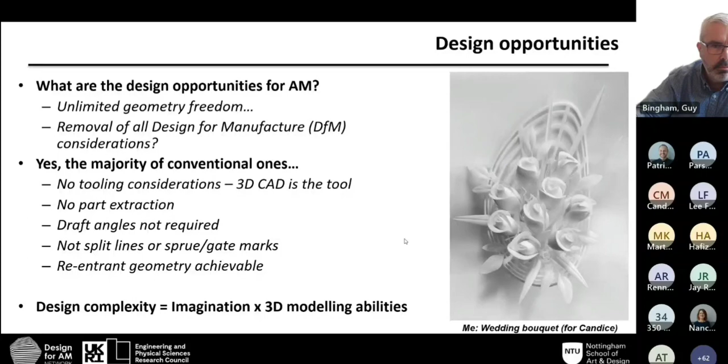Oh, we're still sharing? Hello? Yeah, you're still sharing. Have you moved on to the next slide yet or not? No, I have now. No, yeah, you're good.

Okay, so some of the opportunities AM presents include things like design optimization. Now, topological optimization has been around for a good long while, but it's now becoming really, really accessible to mid-tier 3D CAD platforms. It's embedded with SolidWorks, it's embedded with Autodesk.

And this is about taking your geometry in its existing state, providing loads and constraints, so fixture points, and then using an FEA type process to work out all the stresses and strains on your object, and then removing material where it's not required. And this truly gives you an optimized structure. And we're seeing this done in conventional parts for fixtures and fittings, but we're also seeing this more in the design sphere. So we see an example here.

This is the Generico chair by Marco Hemmerling. And this is really using 3D printing to its full potential. So it does create a particular aesthetic, but this is something that can't be created using more conventional manufacturing techniques.

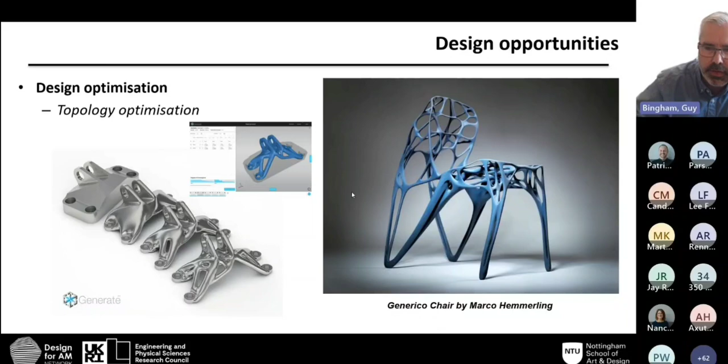And then moving on from that, we can explore the generative design aspects. Now these objects aren't designed to be optimized in terms of some kind of performance characteristic or weight distribution or material usage. This is about just exploring organic and lattice structures. And this has become much more accessible through things like Grasshopper and 3ds Max. So I've got some examples that I've done quite a while ago now.

So the street furniture, again, this isn't an optimized structure, but it's using that particular visual language and aesthetic that can only be realized through 3D printing and additive techniques. And of course, we can explore really, really complex geometries and organic cellular structures. And you can see that on the right, this is a bit of 3D printed art sculpture. But obviously this could be extended to conventional design of products and fixtures and fittings, and be incorporated into that general visual language.

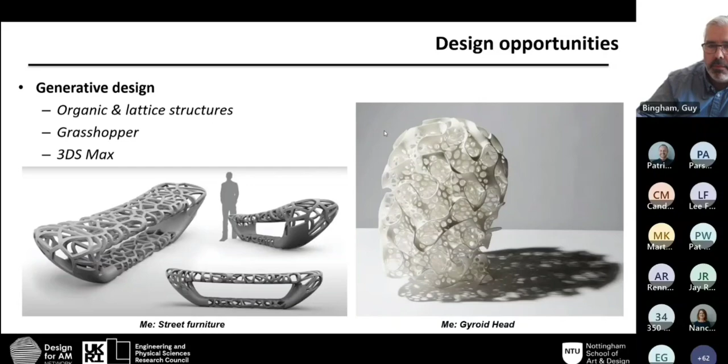Moving on from there, we have design opportunities in personalization and customization. With additive manufacturing, because we're not constrained by tooling, and obviously 3D CAD is our tool, it allows us to explore things like the economic manufacture of a single unit, or N equals 1. And that allows us to do things like complete bespoke designs, or engage in things like co-design and co-creation.

So we have the example here from Lionel Dean, and this is obviously going back a few years now. And it looks like a pretty standard 3D printed lamp, because obviously the market has now been inundated with this stuff. But this was actually based on co-creation. So there was an algorithm deciding this geometry. And through an animation, this would play and evolve and develop over time. And as a consumer, you could co-create. You could stop the animation at any point and then have that printed out. And that is a capability that's only been realized through additive techniques.

But then, of course, we can also engage in things like personalization for the individual. So we can engage in body fitting, and I know that there's going to be some medical applications presented later on. Things like implants, where it is entirely bespoke to a single user.

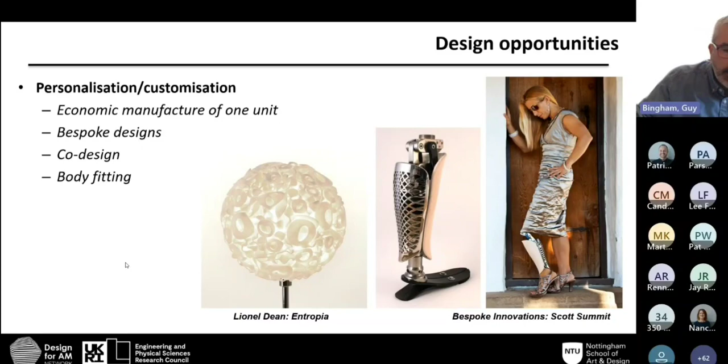But here we have an example from Bespoke Innovations and some of the Scott Summit work, where he was looking at prosthesis. So not only was he using personalization and the capabilities of 3D printing to recreate the fairing here, but also engaging in co-creation and co-design to actually do the more functional aspects of the prosthesis, and then obviously match that to the user's requirement, their particular aesthetic, their lifestyle choices. And again, something that can only be realized through 3D printing.

I think we're all quite familiar with the opportunities in terms of part consolidation. So we have quite a nice example here from Proto Labs. So this is the design journey of a distribution manifold. It would have been a pretty traditional part using conventional manufacturing techniques, injection molding, machining, etc., and a whole host of assembly. But through 3D printing, we can go through an iterative design process here to not only reduce the parts, but then optimize those parts.

So we go through a stage of initially 11 parts, we can reduce that to 7. And again, that can be further designed and refined to become a single part. And then you can engage in things like design optimization, topological optimization, to reduce the weight and increase the performance. But it gives us the opportunity to think about how we can use the design potential to integrate things like fasteners, fixtures. We talked a lot about live hinges, but springs. There are real opportunities here for improving the design of just conventional everyday stuff.

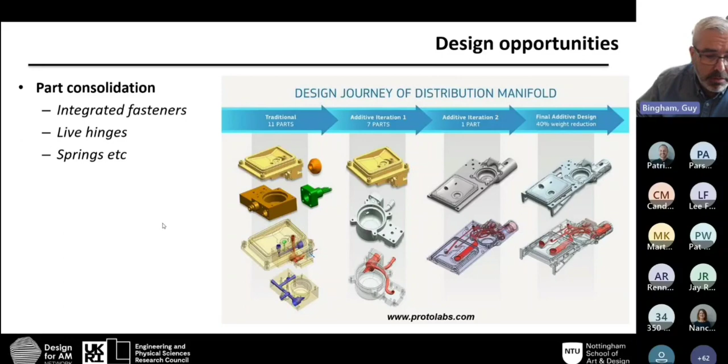And then we have a personal favorite of mine. This is where I spent a lot of my research time. It's thinking and using the technology and its capabilities to create things like multiple free moving assemblies that are manufactured in a single process and require no sort of assembly afterwards.

Now, everyone's probably seen the nice desk toys of integrated gears and switches and movements and levers. But what we were doing was looking at how we could use this technology to generate some chainmail type textile structures. Now, originally, back in 2003, we were using laser sintering, and we were constrained by the resolution of the time. But now the technology has moved on so much, and thank you to Mark in the previous presentation to demonstrate some of the advances in the technology.

But the resolution is getting better and better. The materials are getting better and better. So we can explore things like coloration. We can explore finer and finer textiles. We're exploring footwear, how we can print this out. And I know there's been a lot of work done on 3D printing of the midsole, but the actual textile upper in the chainmail type way.

But also integrating and reducing the process steps in assembly. We can now print out a zip with a textile in a single go, and that's going to be fully functional. Or we could grade functionality through things like 3D printed clothing. So this was an early example of some of the research that we did looking at PPE and stab protection, how we have different types of textiles, free moving assemblies at different parts and locations of the body to provide the protection needed.

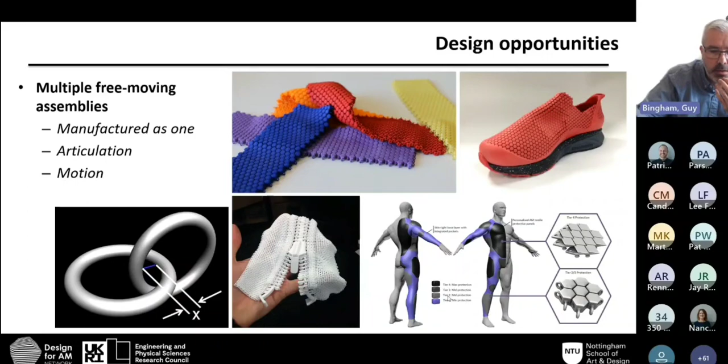And then we have also the opportunity to work at different scales. Now, we're all used to printing out stuff that's at the macro scale that we're used to handling in our hands. But that design complexity translates through to the micro scale. And we are seeing the resolution capability of 3D printing improving all the time, especially in some of the jetting and the DLP technologies. So it allows us to explore a micro world that we didn't previously have access to.

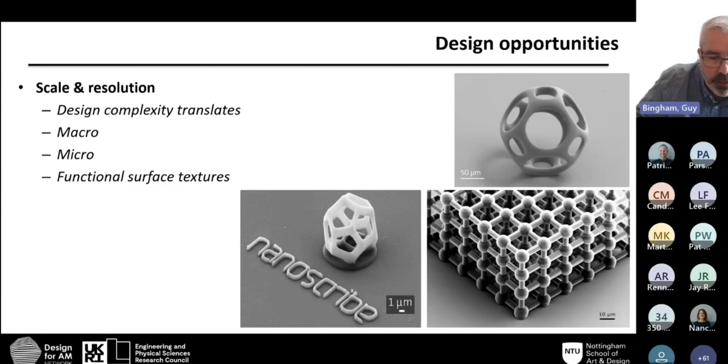Now, these examples are from Nanoscribe, and you've got some scales there for reference, like obviously this is 1 micrometer, but this is less than the width of a human hair, and you're getting that ability to do complex geometry at a really, really small scale. And that allows us to explore some really interesting stuff in terms of design, in terms of surface textures. Could they be functional? Are we not just having the surface of an object? We can actually have that as a functional part of our design process. And that's really interesting.

And then obviously the previous presentation also touched on lots of different materials, and they're developing at a phenomenal rate. The portfolio of materials now available in 3D printing is astonishing. And the design opportunities for that are really, really interesting. New composite materials that could be applied to different environments or different applications. But we're also seeing the opportunity to do multiple materials in a single build, and how we grade the functionality between something that's very rigid to something that's very soft and everything in between.

And some of the early work by Iris van Herpen in the haute couture fashion area was looking at how we mix materials to create something really, really interesting, something that would have motion and flow and feel. And also, I was astonished to see the in-process coloration actually, and the ability to print out the beer bottle on the previous presentation. But color to design is non-trivial. We are very concerned with what we call CMF, so color, material, finish of our objects, and that ability to color different parts of the object, provide highlights. That really speaks to us in terms of a design opportunity.

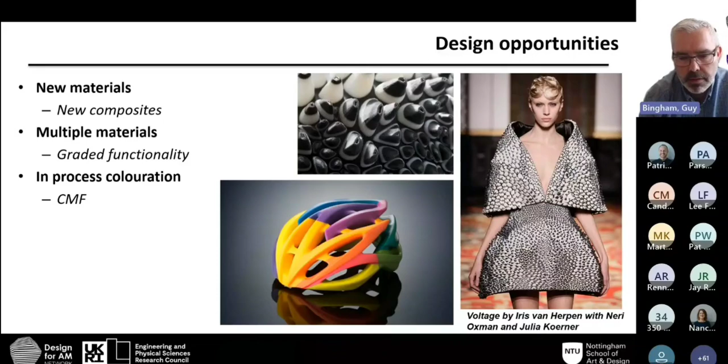So obviously, I painted a picture there that we've got this unlimited design freedom, and we're not constrained by any design for manufacturing considerations. And I don't want to leave you with that because that is not entirely true. When we're talking about using additive techniques, we are, yes, getting rid of all the conventional considerations for manufacture, but we are introducing a whole new set that are both process specific, and we're seeing the range of processes explode, but also geometry specific as well. So you do have to engage in a slightly different detailed design process. And I'm not going to go through all of this in detail.

But within the 3D modeling, we have to ensure that our 3D models are absolutely watertight and accurate. You've got to think about whether we're using the technology to mimic something else, or it is about utilizing this technology as additive manufacturing and therefore the end-use process. But there's a whole load of pre-processing in terms of the data and setting up the machine, and this is kind of the underbelly of additive manufacturing that not always gets discussed.

And then there's always going to be some kind of post-processing. That's getting better and better at getting the part out, cleaning it up, looking at surface finish. Coloration is obviously getting better and better, but depending on the type of material you use, there might be some additional work there.

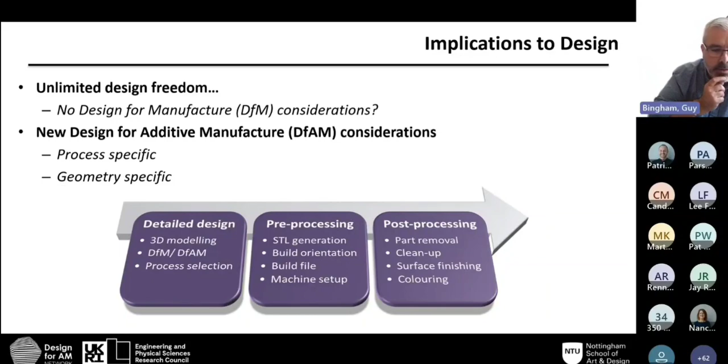So in terms of design for additive manufacturing considerations, yes, we've demonstrated that you can work at the micro scale, but there are generally minimum feature sizes that you want to print within a particular material. If we go smaller than that, it's not going to have the mechanical properties we need to provide the function within the design that we're trying to deliver.

And you've also got to think about part separation and how we design for tighter tolerances. If parts are touching within our 3D CAD environment, they're going to be a solid fused part when they come out. But you can use the design opportunities within additive manufacturing to kind of cheat the process. So if we had to design a collar on a shaft or a bearing on a shaft for a particular design, it's how you use the design freedom to reduce those contact points, reduce that separation, and then mechanically free them later on. So it's quite interesting. It's about being clever with your design work.

And of course, hollowing out parts and shells, that's become very much automated now within the CAD system itself. But also, depending on the process we're using, we're going to have support structures. Some of those are going to be soluble, some of those are not, depending on the type of material you use. And it's how you place them. Do you let the software automatically do it, or do you design your geometry to limit the amount of support structures required?

And then, especially with the powder-based systems, we often talk about the ability to do conformal channels. And some of the examples I've shown where we've got really complicated geometries, how do you get that powder out? Sometimes that is an absolute nightmare. But again, it's about using the design freedom of the process to aid you with that problem.

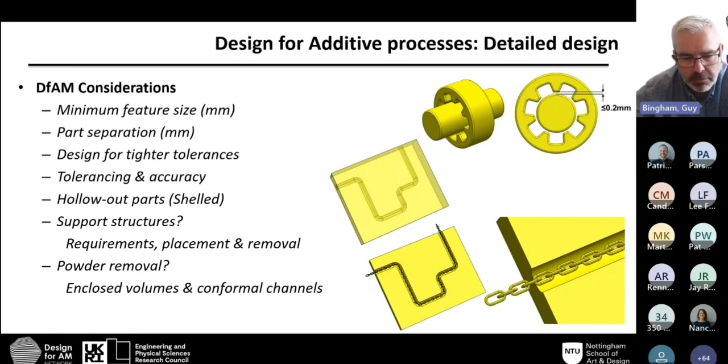Okay, so design opportunities: unrivaled disruptive technology in terms of design freedom. The ability to create complex geometry far outweighs anything else that's currently available. The opportunities to optimize our design are becoming increasingly easy for designers, because all of those techniques and strategies are now being built in and made easy to use in terms of usability and workflow. That ability to personalize and customize your design work and engage in things like co-creation, that's really interesting from a design point of view.

We're not constrained by making large batches of stuff or operating at particular volumes. We can think about how we can design for a single user or a group of users. And then, of course, parts consolidation. How do we use design to explore reducing assembly and post-processing aspects?